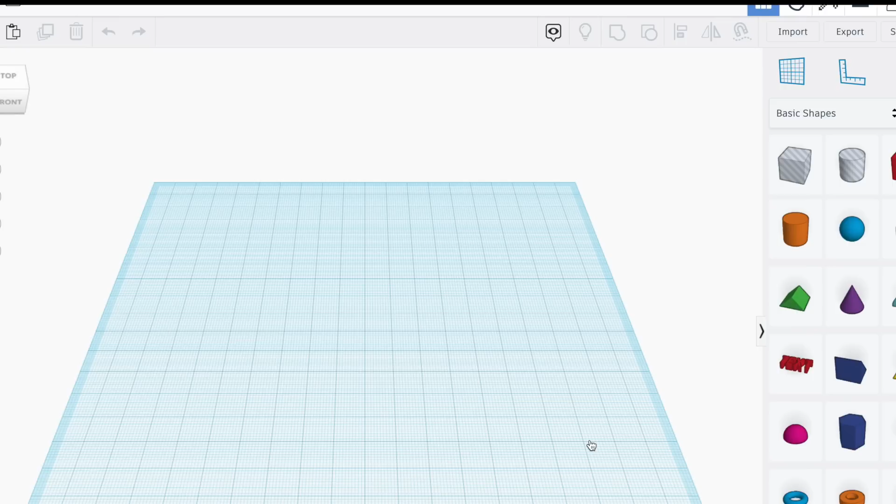Once it's imported, you'll see a flat version of the image. This gives us a really good foundation to make our silverware. The first thing I do is increase the height. Then I just cut away the excess material using various invisible shapes.

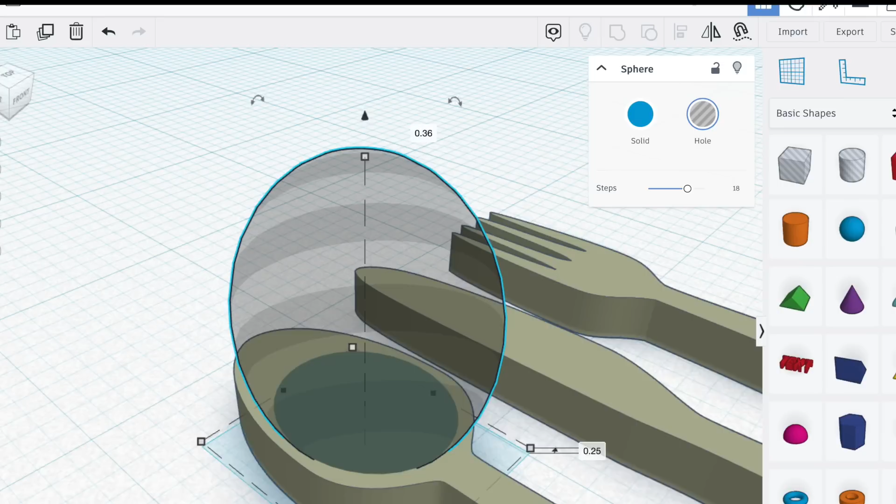For the spoon, I take a sphere and use that to cut into the solid piece. There is no formula for this, it's kind of like carving freehand, but with software. There are much better programs for this process, but Tinkercad is free and super beginner friendly. I also use a rectangle for the handle area.

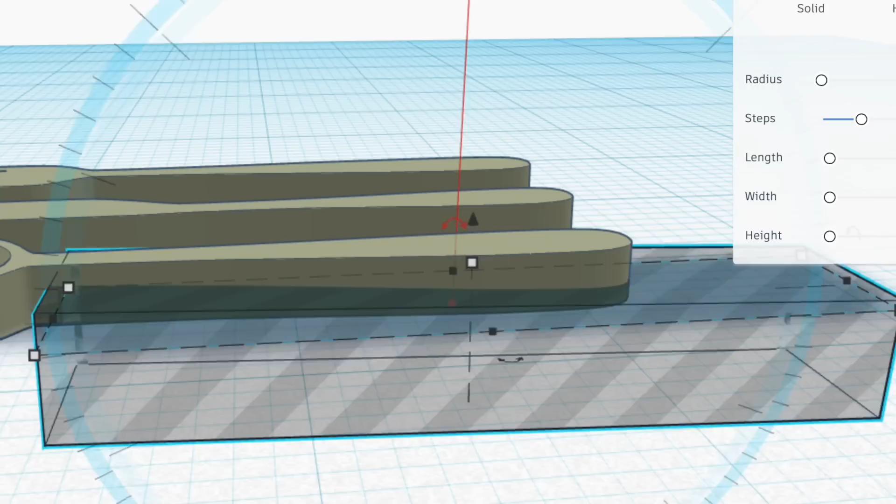To cut off the rounded area at the bottom, I duplicate the spoon and then cut off the handle. Stretch it out so it's a bit bigger. Then place it underneath the spoon. Lower that just a bit and use it to cut away the bottom. Keep working on this until you get a shape that you like.

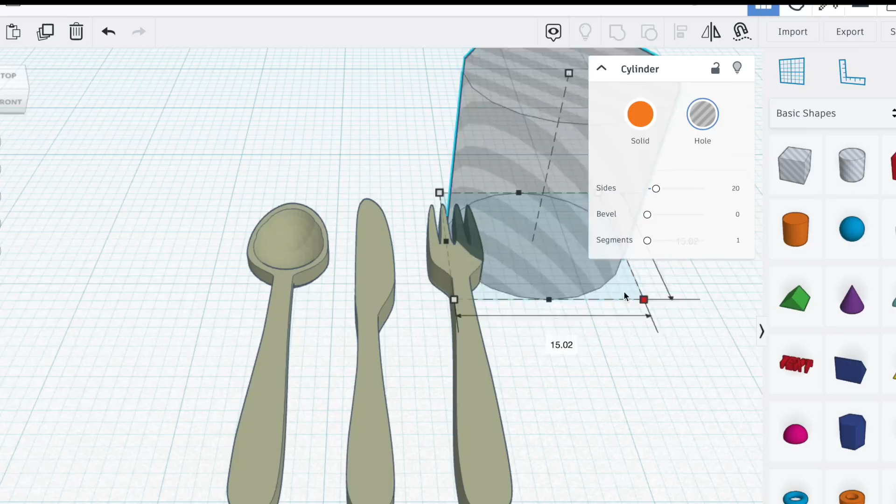For the fork, I take a cylinder, turn it invisible, and then turn it on its side. Stretch it out so it's oblong, and I use that to cut away at the front of the fork. It honestly took a long time to get to this final result. Just be patient and continue to carve away until the shapes look the way you want.

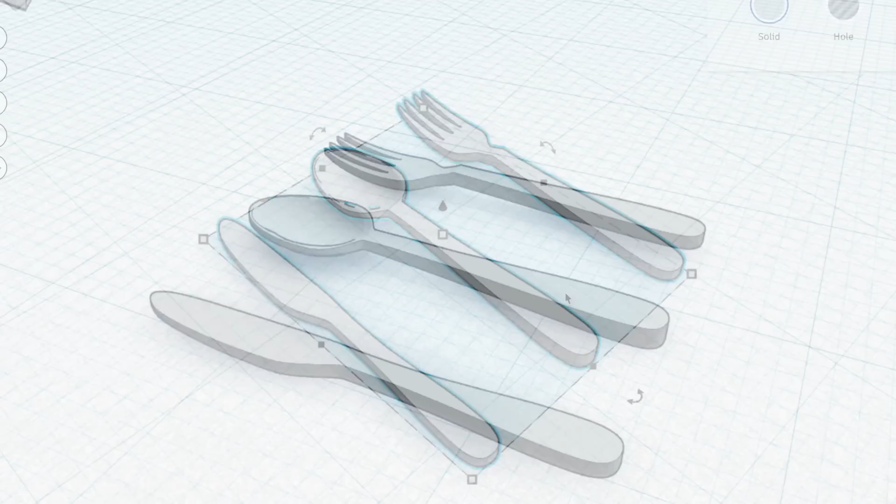When you're finally happy with how it's turning out, you can print it. The best way to print these tiny utensils is to rotate them 45 degrees and add some supports. Supports are just bars that go underneath your model to help your printer print them out without any problems. This is how much support I ended up needing underneath my set.

The supports are really a necessary evil. They allow the model to print perfectly, but they are kind of a pain to remove. I use my clippers to carefully snip off all the supports. This is absolutely the step that you want to take your time with, as these utensils are very thin and easy to break. So it's crucial not to rush this unforgiving step.

Do the same for the clear model. To make this clear version actually clear instead of foggy white, I'll be using a clear gel top coat. Simply brush it on both sides of the model and cure it under a UV light. The varnish brings the clarity back out of this resin. You can also choose to use a spray varnish if you don't have access to a gel top coat.

For the chrome version, I first do the same gel top coat step. This gives the print a really smooth, flawless finish. That will be essential for the chrome to look realistic.